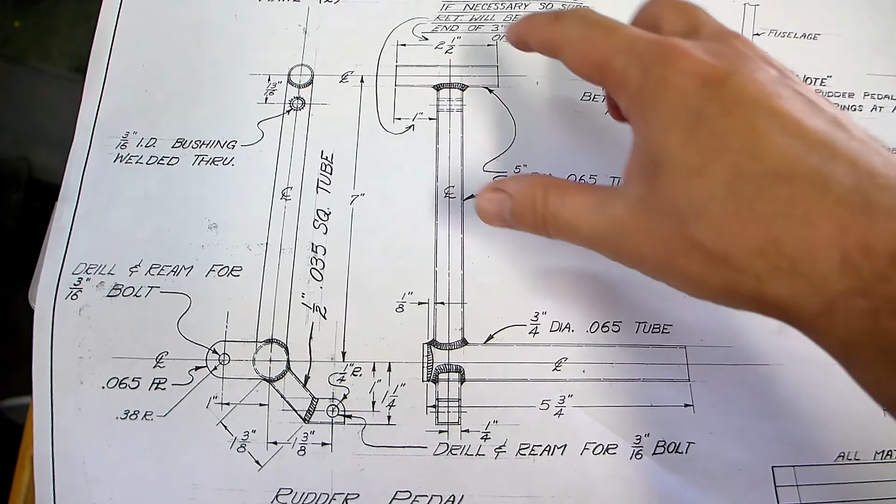Last few days I've done a little practice oxyacetylene welding. And I think I'm doing a little better. So what I'm going to do is start with some simple parts, the rudder pedals and the brake pedals. And I figured my skills will be good enough after doing those that I can move on to more critical things like Station 0, which I'm going to extend 3 inches where the engine will mount onto the plane, so that's pretty important.

These are just a few little tubes that I'll weld together, and I need to cut a few more pieces for the brake pedals and for some plate pieces that go on here. So these are pretty simple, so this is what I'm going to do now, and hopefully they'll turn out okay.

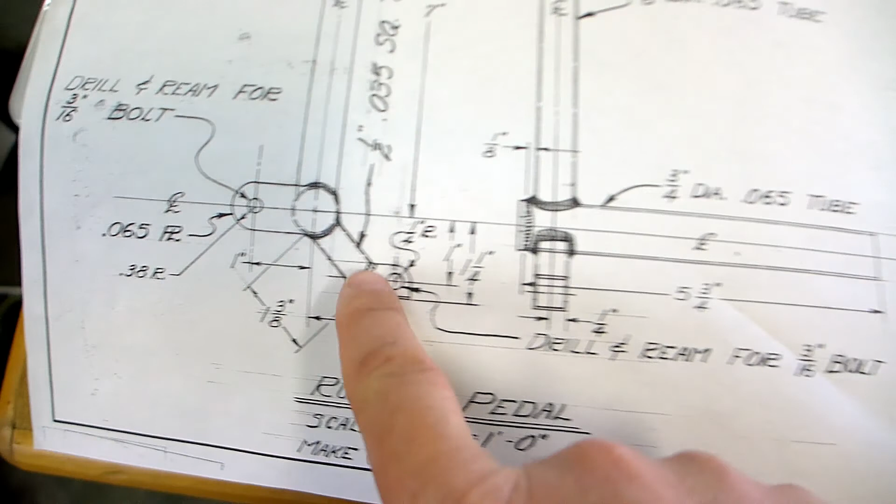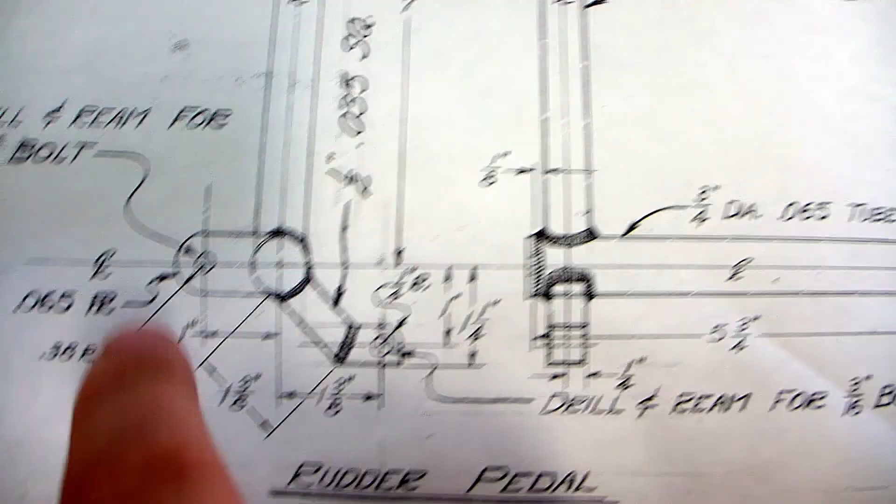Alright, so these are the rudder pedals. So you just got, these are 5/8 inch diameter, 2.5 inches. This is about 6.5 inches long. Then we got a 3/4 inch diameter tube here. And that's essentially one rudder pedal. That's what I'm going to weld up right now. These 3 pieces. Should be pretty straightforward. Then there's some other things I'll do after that.

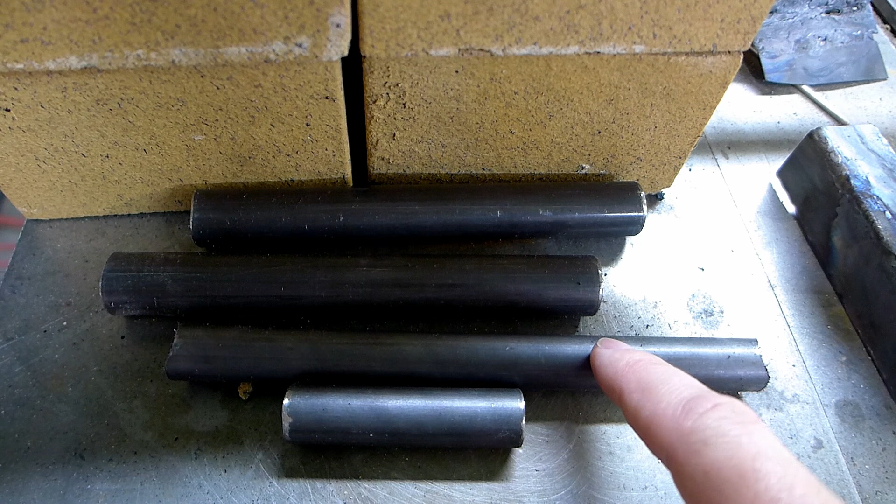Bushing goes through here. A little piece on the bottom that's square tubing, which I don't have yet. There's a little plate that goes on down here, which I will maybe do after I do this first bit of welding, because I do have that plate. So what I'll plan on doing for things like this, and here's the brake pedal. This is a piece of plate as well. These are both 65 thousandths.

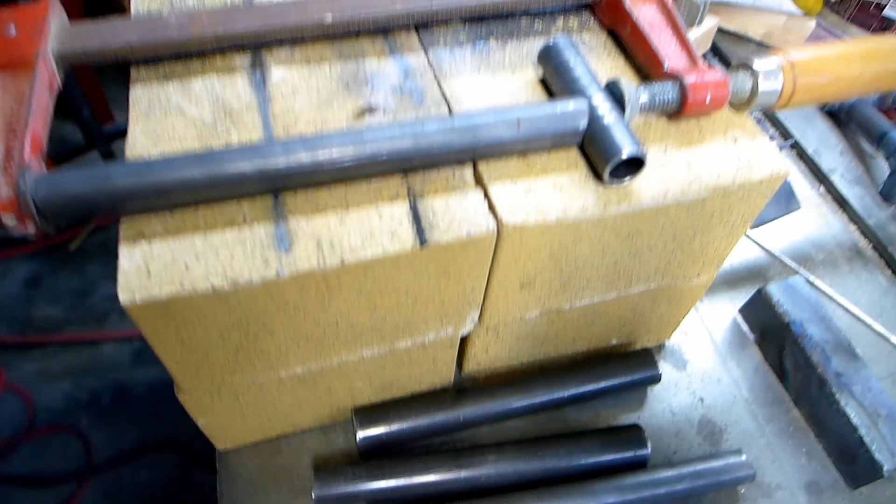I'll just use my angle grinder and chop that roughly to size, and then grind these curves on it and get it to be the right shape. So pretty rudimentary. So I'm going to go ahead and weld these up now. So these are the tubes, the 5/8. So this is the piece that is vertical, and then this is 90 degrees to that, and this is 90 degrees to it on the other side.

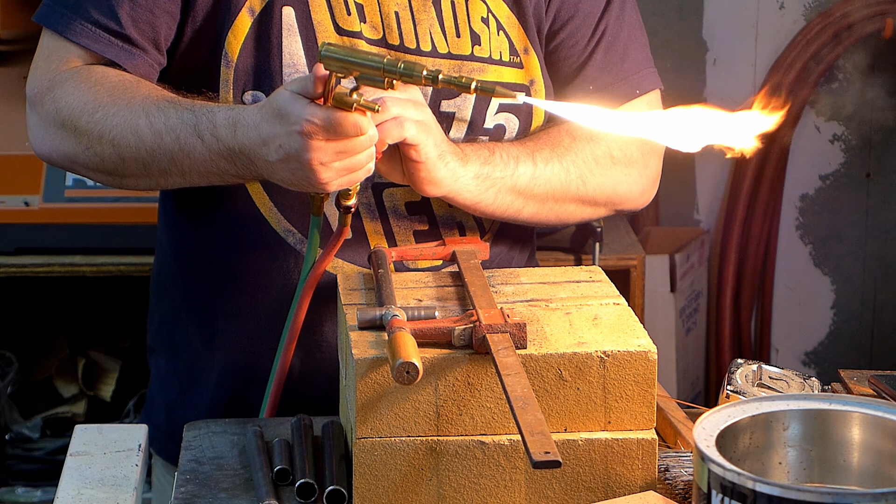And these pedals, by the way, let me go back over here. A rod sticks out from inside the fuselage above the floor, and this pedal hangs from it. So it will be the left side of the plane from this vantage point, and this pedal dangles from that, and you press on the bottom part. That's the arrangement. And so this slightly larger tubing, your foot will go on it, then this will go up from that, then this will go on the top, and the pedal will rotate around a rod that goes inside this.

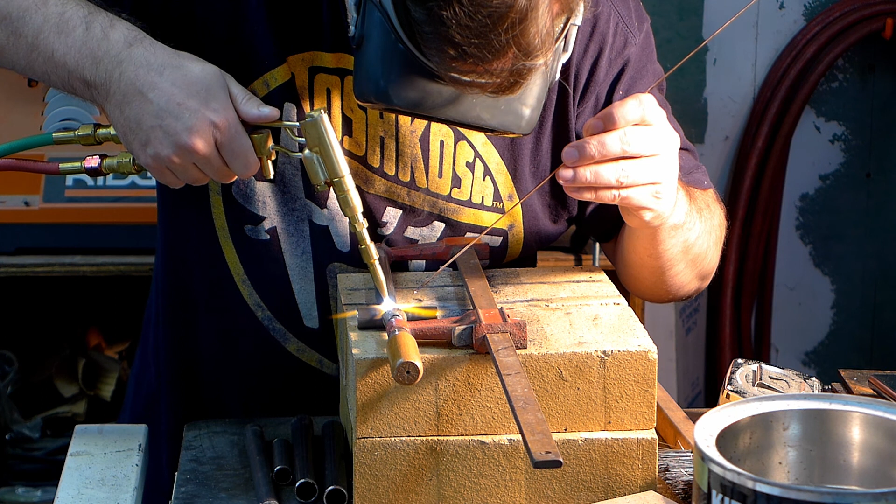So I've just got the first one set up here. I just ground a curve on the bench grinder on both ends here. The radii are a little bit different. One's for the same size tubing, one's for the 3/4. So the ends of these have a slightly different radius.

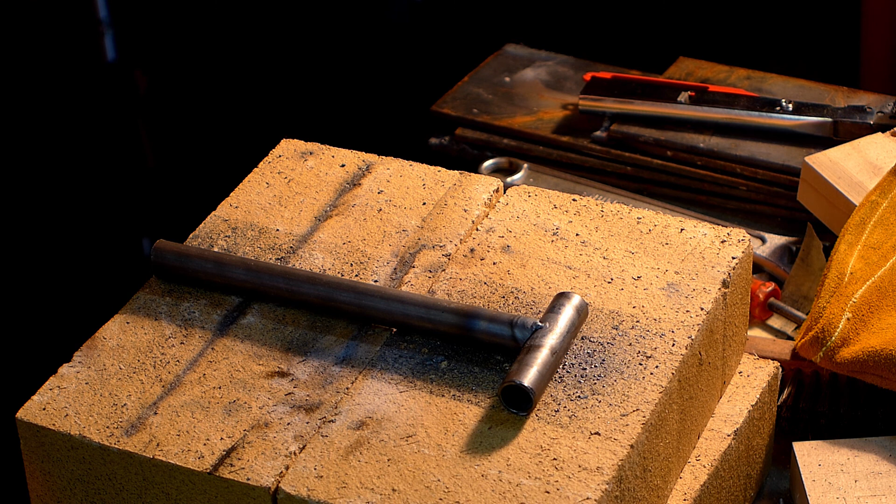Each end does. So I'll start out, tack this guy, flip it over, tack the other side. Then I'll remove it, take a look at it, make sure it's square, and that these are on the same plane. And also then the center of this will need to be centered on that larger tube. You can't just lay them flat, because then this would be on the surface and the larger tube would be up higher. It would be offset. So the center of this will need to be suspended slightly up so that it hits the center of this tube, if that makes sense.

But that shouldn't be difficult. Actually, I'll probably just clamp it together like this so it'll force it to line up correctly, as long as my grinding job was okay. Alright, that's what I'm going to do.

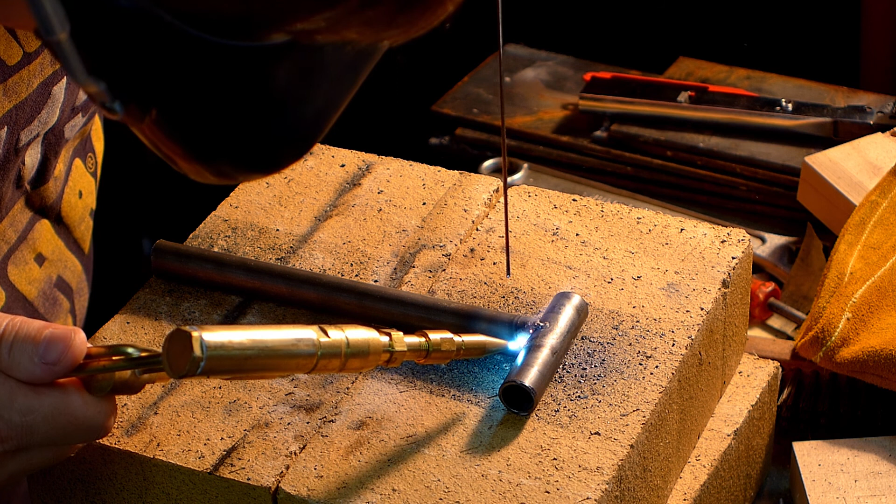So you guys have probably seen this torch. It's the Henrob or the DHC 2000 or the Cobra. It goes by different names depending on how far back in history you go. I saw a guy that took the aluminum off, and I think it's light.

It's these two plates that go on here. This is light, so I don't think he did that because of weight. I think it just gives a little smaller area to hold on, and maybe he liked that feeling a little better than having the larger thing to grip on. So I thought I would try it.

Anyway, I took that off. I'm just trying it to see if it's a little more comfortable. Since I'm new at this, I don't really have a preference. I'm just experimenting. So let's pull down my goggles. I've got a light here so I can see a little better through the mask before I start to weld.

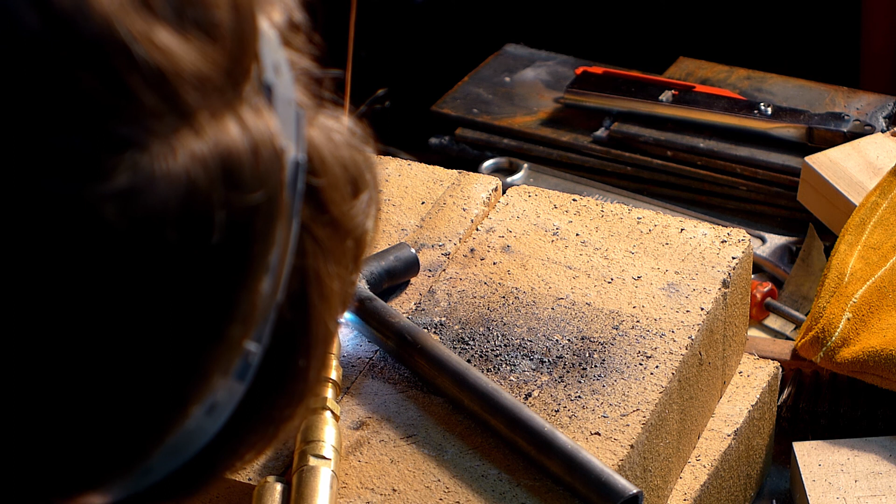All right. A little bead on there. And melt that into the two sides. There, got a good tack. Flip it over, try not to knock it out of whack. Actually, I could probably remove the clamp.

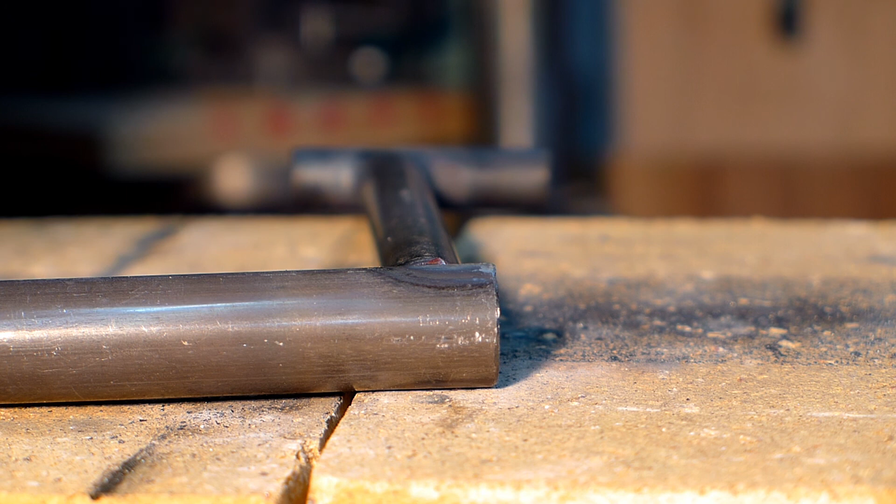And there we go. Two tacks. Whew, that's a bright light without the mask on. Alright, let's get rid of that clamp. Alright, so let's see. Make sure that that's 1 inch from the edge here to the center of this tube. I need to keep reminding myself not to grab hot tubes. It's probably not hot down here. No, it's not.

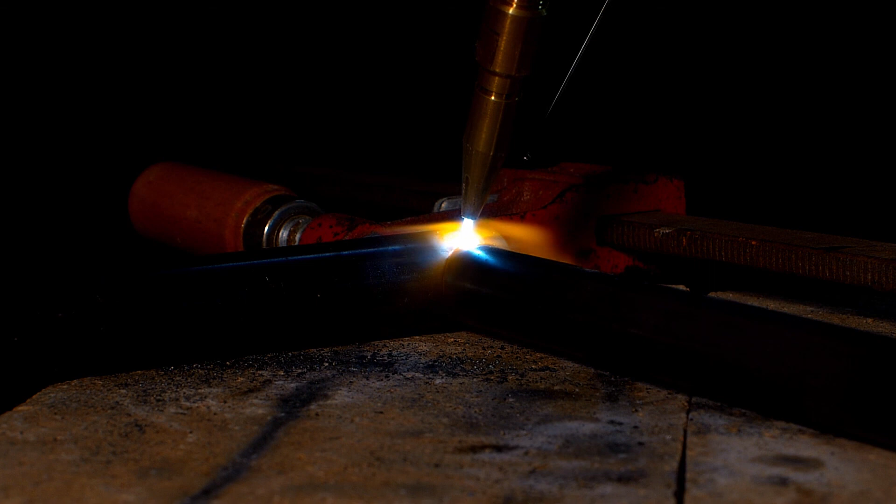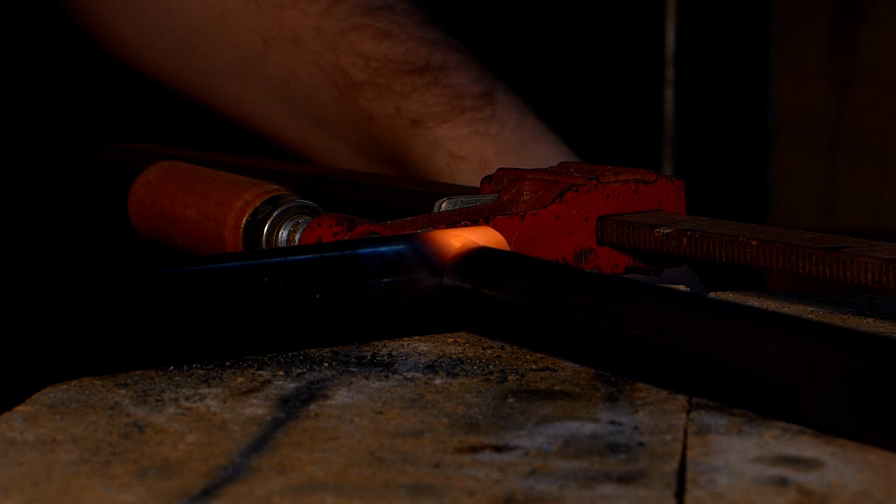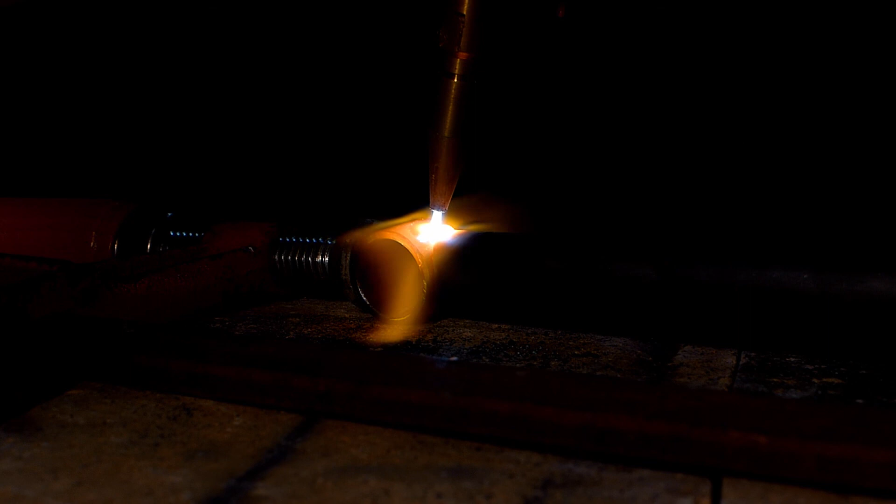So, is that square? Looks pretty square to me. Yeah, it's starting to get a little warm right about here. And if I use this, I can hold it up to the light. I would say that's not exactly square. Needs to come this way just a hair. Oh, well, okay, not quite. Yeah, that's good. So just some light taps and that's square. So let's go ahead and weld it up.

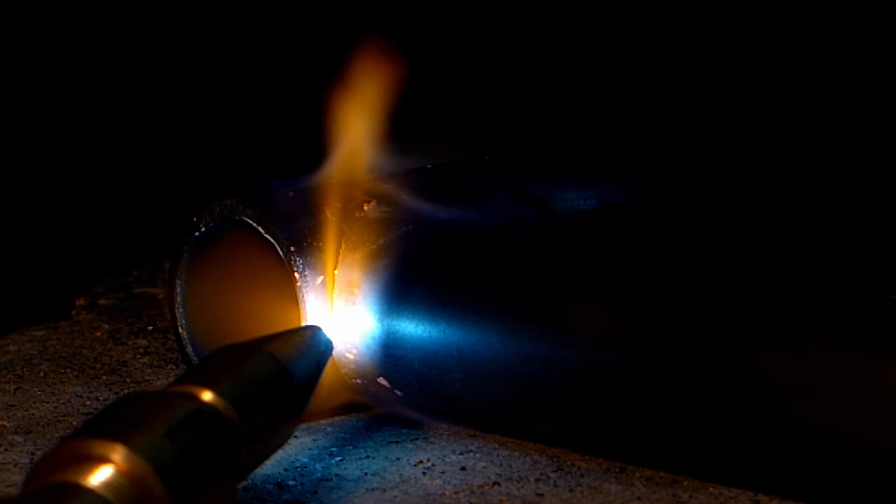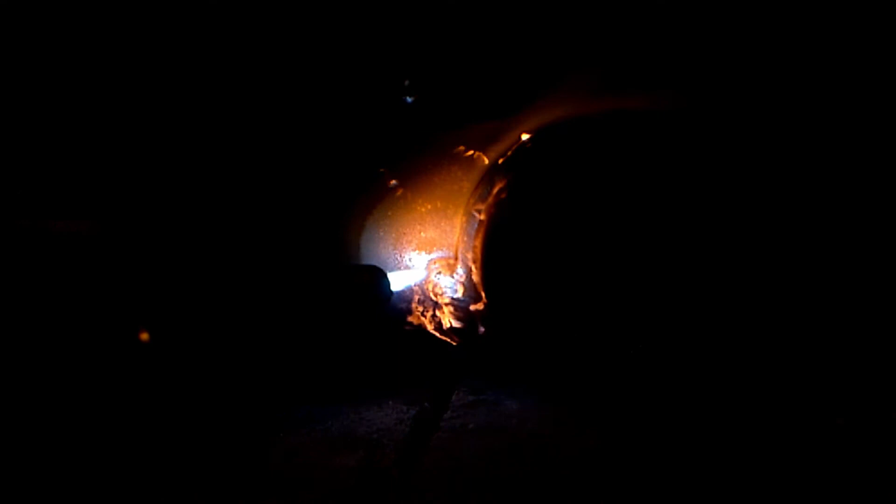I guess there's something called regulator creep, which means that you can adjust this thing and then it can go out of whack because the gas coming out of the tanks isn't regulated absolutely perfectly. So, I don't know. And so I guess you just have to keep tweaking these over time.

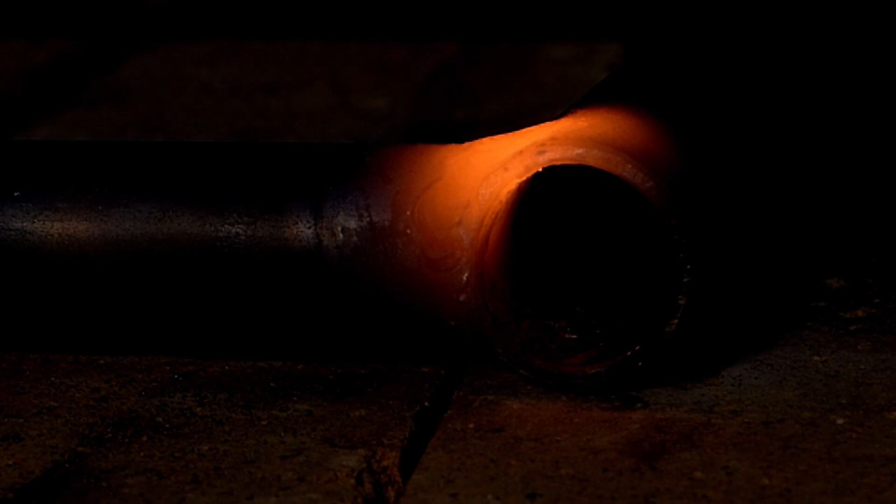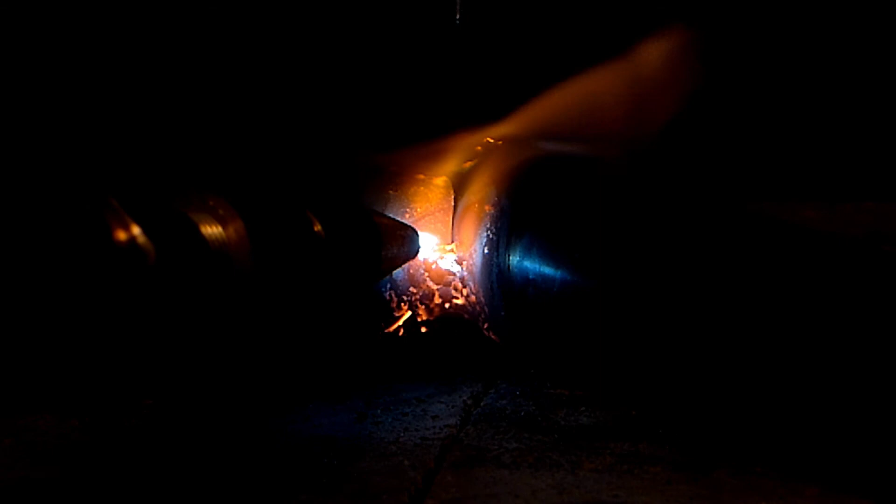And some people say never add, so always have a tiny carburizing flame so that you've got a little tiny bit of a central cone, because if you get rid of the central cone entirely by adding more oxygen, you don't know if the regulator creep ends up adding too much oxygen, because has that central flame just disappeared or has it long since disappeared and you've got way too much oxygen. So I don't know. Anyway, it's all kind of fun stuff.

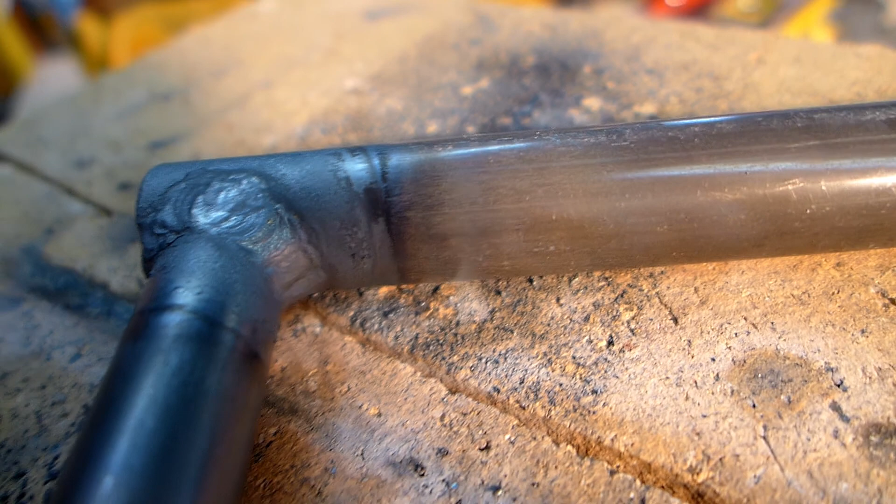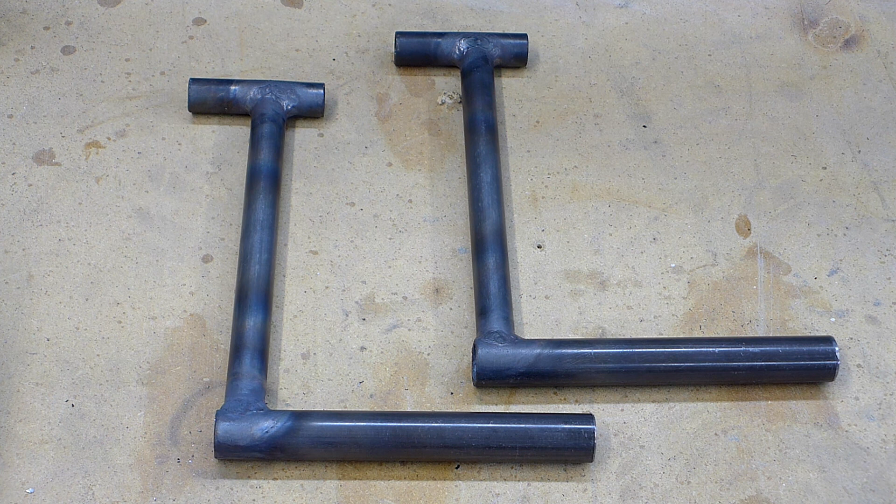See if I can turn this thing up. Seems like it's taken a while to form a puddle. Although maybe I don't have quite enough oxygen coming out of the tanks. And I know my tip's big enough based on what I've been doing the last few days. There we go. There we go. There we go. All right.

I like to weld this upper right quadrant from my viewpoint, so I flip it over, then I'll flip it around and do the other side, the other corner. And what's kind of cool is after you get the initial weld done, you can go back. If you feel like you didn't get great penetration in one spot, you can go back and melt things up a little bit more and fix your weld if you didn't get it quite right. So that's kind of nice.